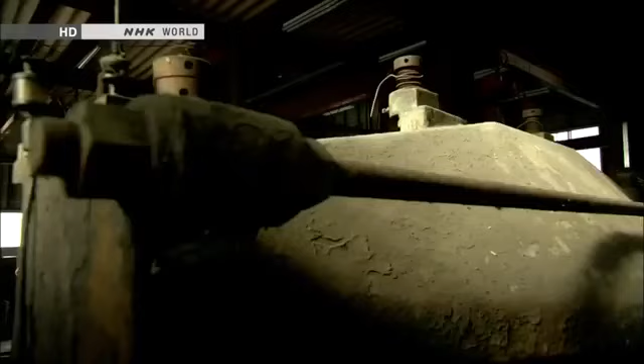The future is just around the corner. In a workshop near Mount Fuji, a curious being has appeared. It's 3.8 meters tall and weighs 4 tons. It is a giant humanoid robot named Kuratas.

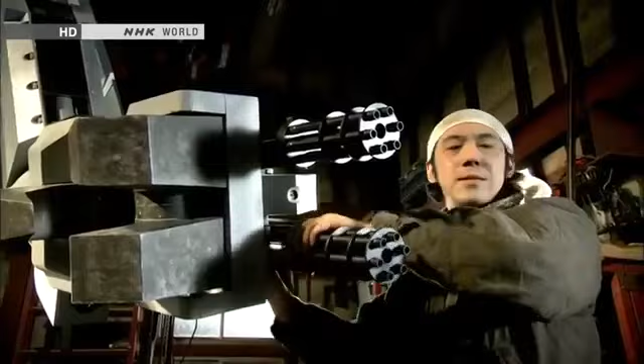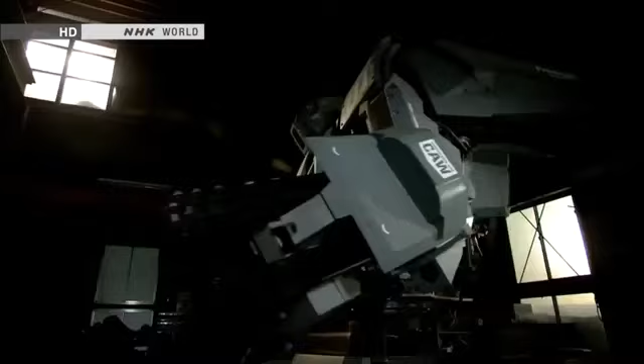Kuratas is a contemporary artist's creation. He holed up here for 2 years, building the robot with input from an expert. He calls Kuratas a work of art, but it's a sophisticated piece of machinery. A person seated inside can control the robot, move its limbs, and grab things. The artist says he was inspired by robots in science fiction tales and animation. That vision sustained him as he worked in solitude.

Things that were once unthinkable are becoming real. How will robots evolve? Well, military applications could be one option. They'll probably become more and more like humans. They could surpass us in strength and ability.

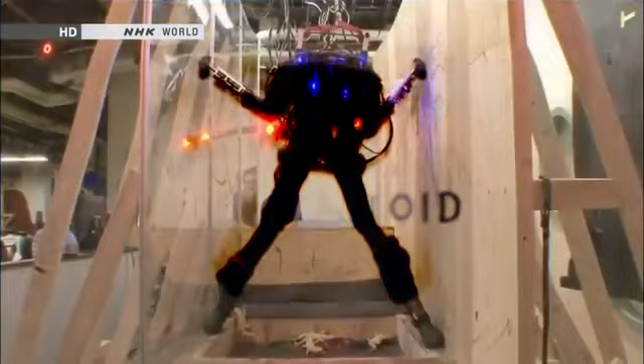People long dreamed of creating these extreme machines. Now, humanoid robots are here. They think like we do, move like we do, and even sacrifice themselves for us.

We want our robot to change society, because robots must be useful. Electronics and computing, progress in vision systems, there's many pieces of it. We will see much more capability continue to grow.

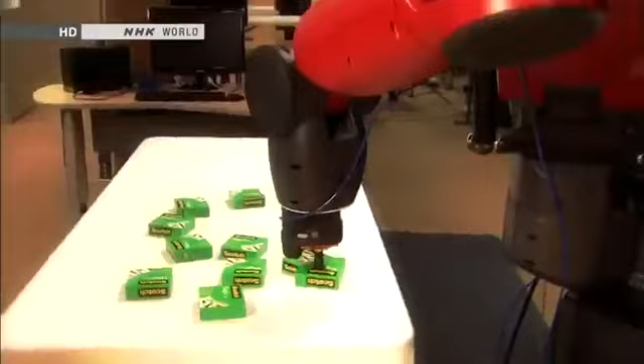Since the Industrial Revolution, people have entrusted some jobs to machines. But there may come a day when humanoid robots do much more complex jobs. Then, what will people do? You'll see more and more robots doing things in society, whether it's manufacturing, service applications, or home healthcare applications. The key will be skillfully dividing labor between humans and humanoid robots.

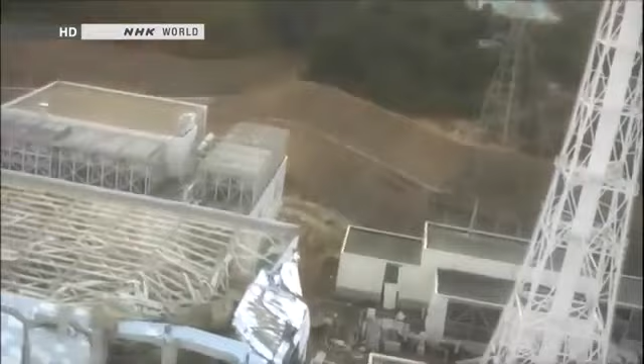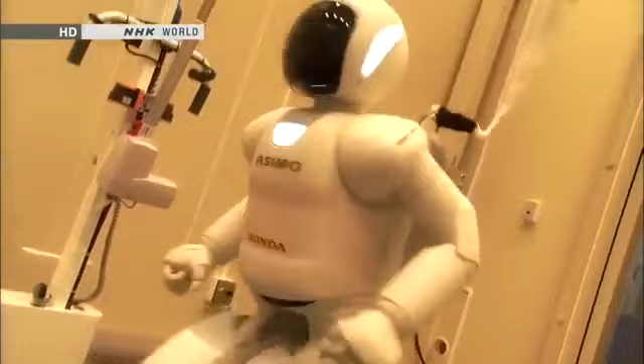We're eager to launch it soon to end the crisis. By joining forces, we can make a truly useful contribution. Only a humanoid could do it. Or the day will come when robots will really assist mankind. The nuclear disaster in Japan sparked explosive advances in humanoids at the front line of robotics development.

This program explores the future that's fast approaching.

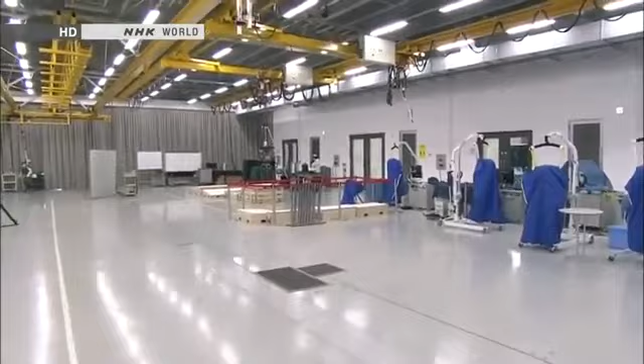Asimo was created by Honda's research and development subsidiary. We were allowed to film their top-secret robotics laboratory. Japan is a worldwide leader in the development of humanoid robots. Asimo is the country's crowning achievement. Engineers continue to make improvements.

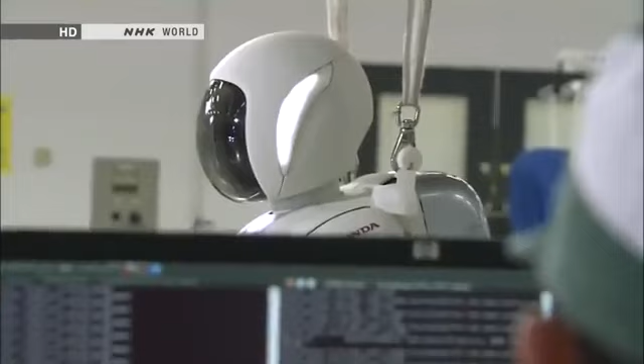Asimo's most innovative feature is its advanced intelligence. The robot can think and act on its own without human intervention. That's made possible by sensors that replicate our 5 senses. Asimo's head contains 8 microphones. It uses them to listen and engage in conversation.

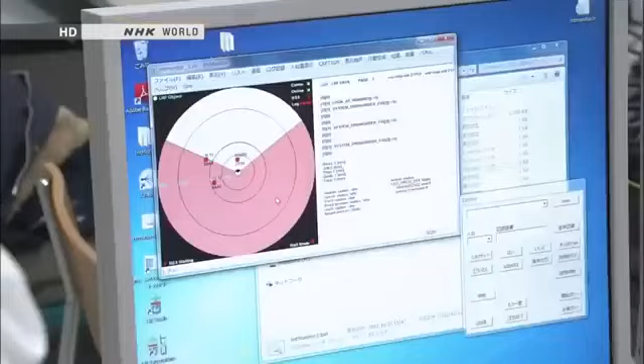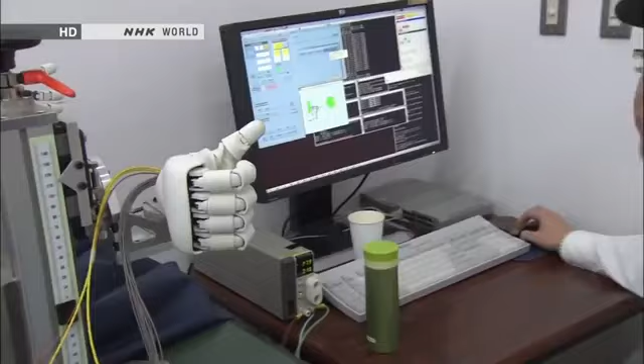Asimo also has a sophisticated sense of touch. Its fingers can make subtle movements, like a person's. Sensors are embedded in the fingertips, too. They can gauge the hardness of an object, like human fingers do.

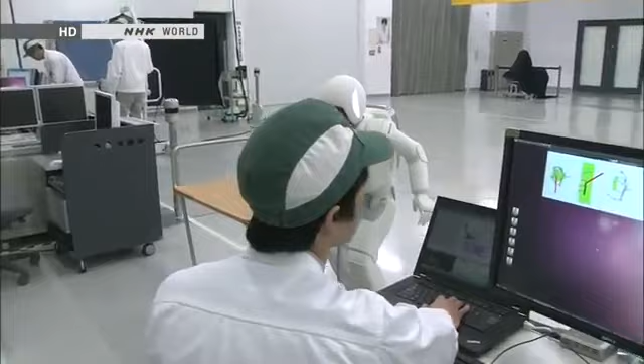Most robots use a fixed amount of strength to grab things. But Asimo exerts more power to open a tightly sealed water bottle and less when holding a paper cup. Its artificial intelligence uses information from the fingertip sensors to adjust the grip.

The developer's ultimate goal is for Asimo to be a valuable partner that coexists with humans. The engineers who created Asimo all grew up watching animated shows about robots, such as Astro Boy, Doraemon, and Gundam. They dreamed of someday making their own.

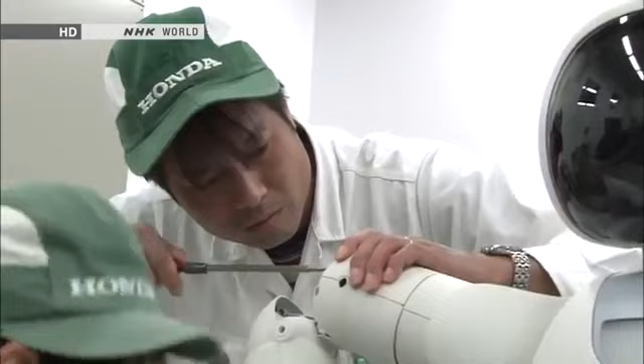Satoshi Shigemi is the development team's leader. He has been designing robots for the past 16 years.

From the beginning, we wanted to design a robot that could help people. To realize that dream, we're constantly asking ourselves, what kind of robot would be able to change society, make people happy, and make life easier for people around the world? Our idea is to create a robot that will change how people live. We're working through the technological issues, one by one, in order to reach that goal.

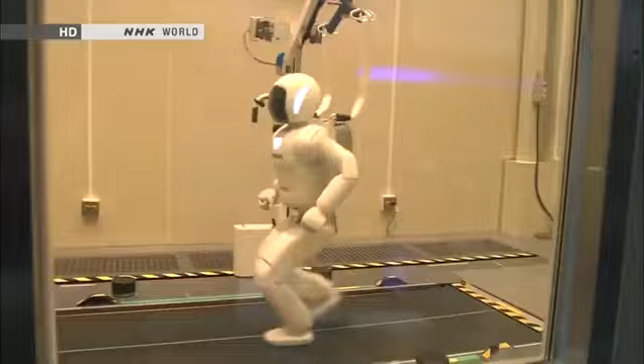Asimo's advanced physical capabilities are revolutionary. The robot can walk and run. It can reach speeds of up to 9 kilometers an hour.

For robots, walking is much easier than running. When running, both feet momentarily leave the ground. Balancing in mid-air is no easy task.

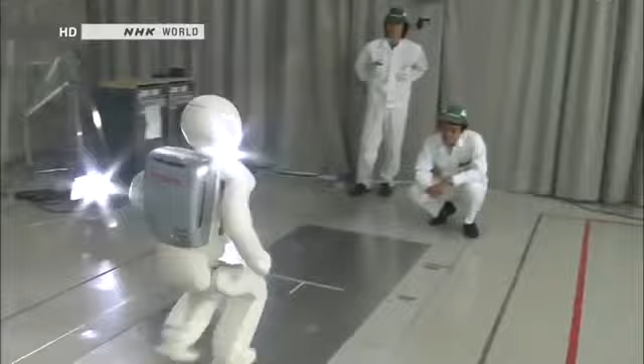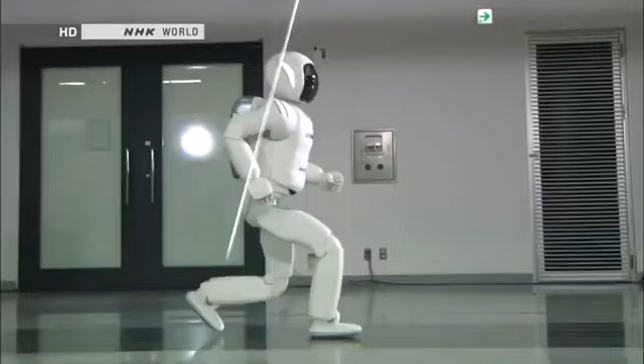Maintaining posture while jumping or floating in the air was a major technological breakthrough. Asimo leans its upper body slightly forward to maintain overall balance. It goes forward straight in the air.

Sensors in Asimo's waist measure the robot's angle. It leans slightly to compensate, forward or back, side to side. That's how it stays perfectly balanced in the air.

Asimo has been evolving ever since development began in 1986, much like a growing child. But something happened that made researchers realize Asimo's real-world limitations.

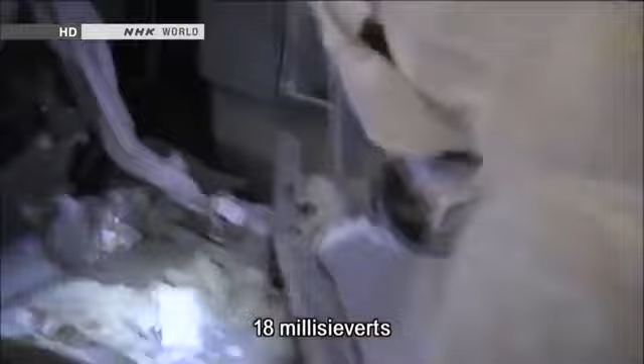It was the accident at Tokyo Electric Power Company's Fukushima Daiichi nuclear plant. The damaged reactors released radioactive substances, making it difficult for humans to deal with the crisis. People needed something that could confront the dangers and bring the plant under control.

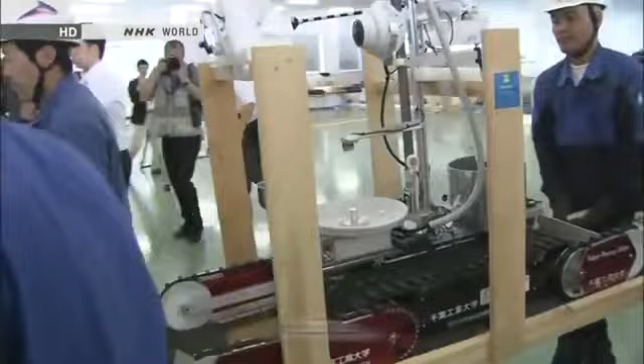Robots. Japanese officials sent a request for robots developed by the US military. Then, a variety of Japanese robots have been enlisted as well.

Robots have proven to be useful, but 2 years after the accident, they're only used for inspections. They're not able to do all the work of humans. What about Asimo?

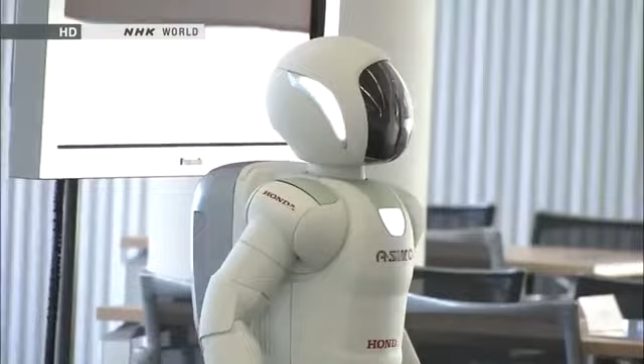Right after the disaster, people flooded Honda with phone calls and emails asking the company to send Asimo to the Fukushima plant. But Asimo wasn't up to the task. It could move nimbly over an office floor and other flat surfaces, but large vertical gaps and obstacles were a different story.

We heard from many customers. We ourselves regretted that Asimo couldn't be of help. It was obvious that Asimo we had built wasn't ready for real-life action. We realized right away that we needed to make something different, something new that could offer immediate assistance.

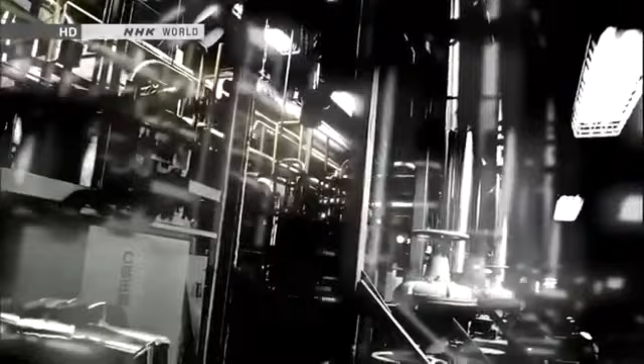Honda wasted no time. Company officials offered to create a robot free of charge to assist TEPCO in the recovery. TEPCO accepted. Officials asked for a robot that could open or close valves inside the nuclear plant. We wanted to flush out radioactive materials that remained inside the pipes and bring down radiation levels in the facility. That was our first goal.

Unless we opened or closed the valves, the area would remain highly radioactive, and that would prevent workers from entering the facility and impact the entire decommissioning schedule.

How many valves are there? Each unit has from several thousand to tens of thousands of them.

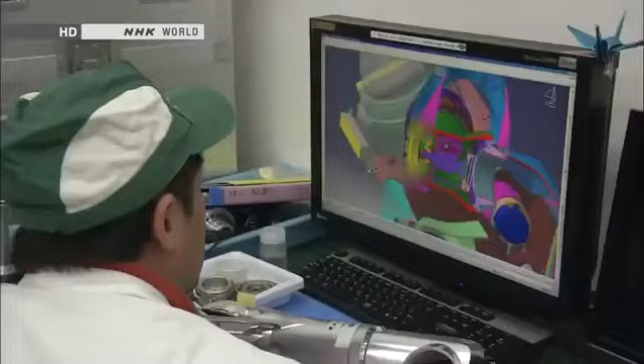In July 2011, 4 months after the accident, Honda began designing a robot for use at the nuclear plant. Members of the Asimo team were put in charge of the project. A humanoid robot would take too long to build, so engineers focused on making a robot specifically for operating valves.

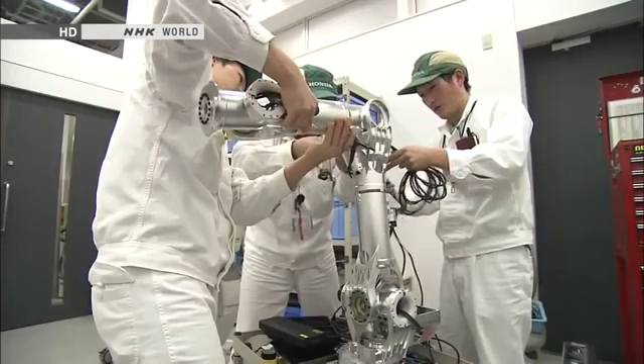Asimo was crucial to their efforts. Its ankles employ advanced balancing technology. Developers reasoned that using it would allow the new robot to work inside rubble-filled reactor buildings.

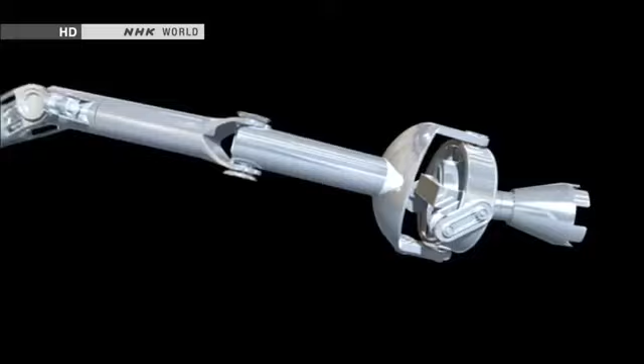The team worked exceptionally fast, completing a prototype in just 4 months. They turned Asimo's leg into an arm for operating the valves. Even when the base moves, the arm remains steady.

So far, so good. Officials from TEPCO evaluated the prototype at the National Institute of Advanced Industrial Science and Technology. The government-backed group for cutting-edge research contributed to the development effort.

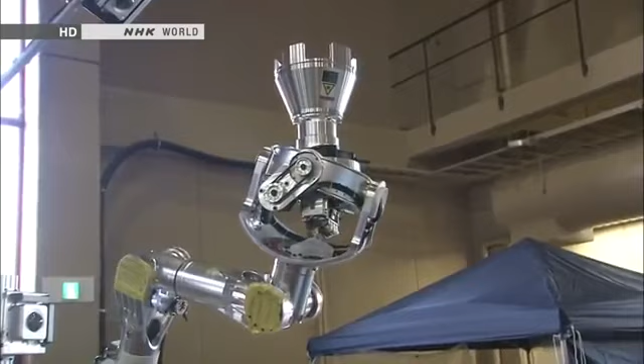A TEPCO official couldn't take his eyes off the robot's movements. We may be quite demanding. That's okay. We might be quite direct.

The test is designed to replicate conditions inside the nuclear plant. The robotic arm is remote controlled. Testers send the arm toward one of the valves.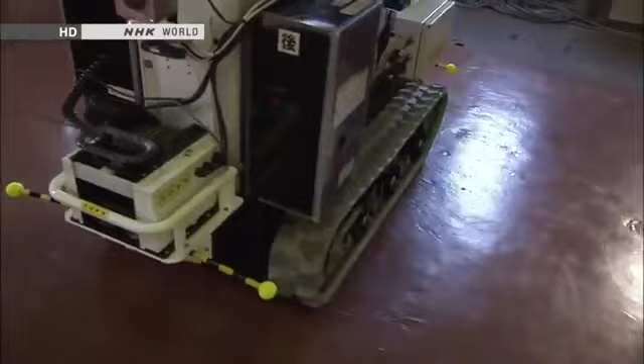There are a number of unknowns, including the condition of the valves. They may have rusted since the accident. A valve might break if the robot applies too much force, or it might not budge at all.

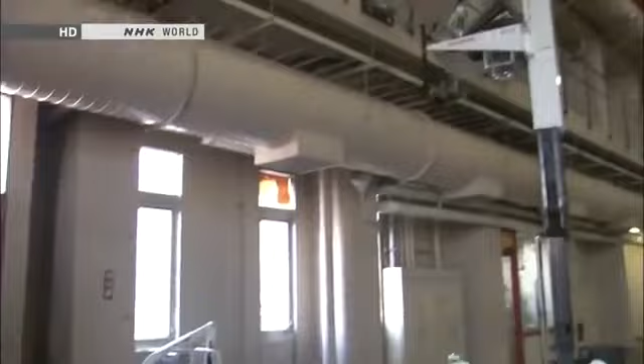The robot uses just the right amount of force and turns the valve on the first try. It's passed the test. This robot can do more than inspections. It could help in the recovery effort.

From what we've seen, the robot seems near perfect. We want to use it as soon as the need arises. It's important that we quickly do what we can to make that possible.

The Fukushima accident also encouraged U.S. developers to design emergency response robots. Department of Defense officials have spearheaded the effort. Before, they had shown little interest in humanoid robots. Now, they view them as vital for disaster response.

The architect of the new strategy is Gill Pratt of DARPA. He oversees funding for leading-edge research at the Department of Defense.

There are many aspects of disaster response in Fukushima that inspire people in robotics to work on new capabilities. If they were able to take action during those first 24 hours, then the first reactor maybe would not have blown up in an environment that is too dangerous for a person to do.

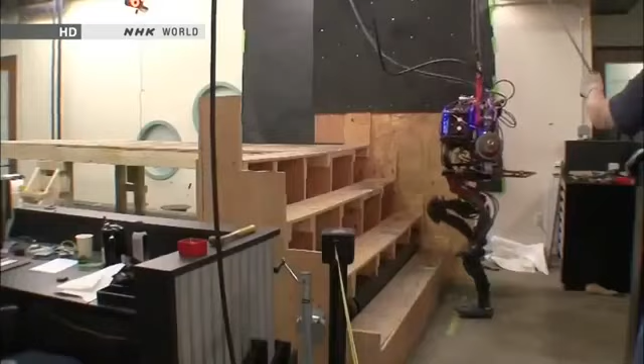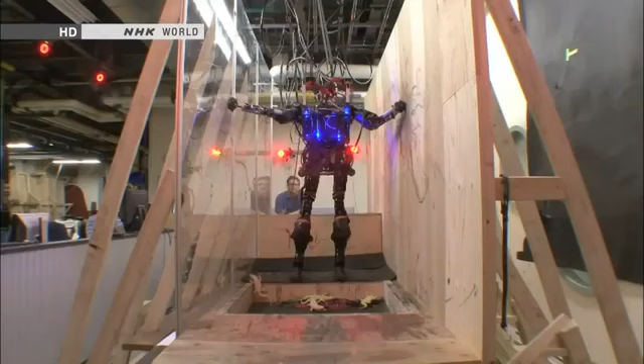Tests of this prototype were going smoothly. It can easily climb stairs and jump from a height of nearly 1 meter. It can negotiate obstacles using its arms and legs. It can already handle more demanding environments than ASIMO can.

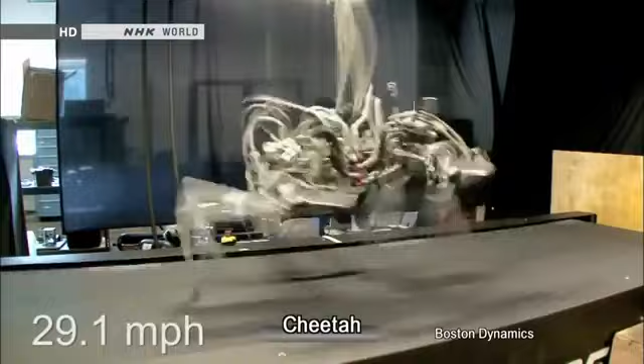Atlas is loaded with technologies originally designed for military robots. A quadruped robot called Cheetah can race through a battlefield at 50 kilometers an hour. LS-3 is for transport—it can carry heavy supplies for soldiers.

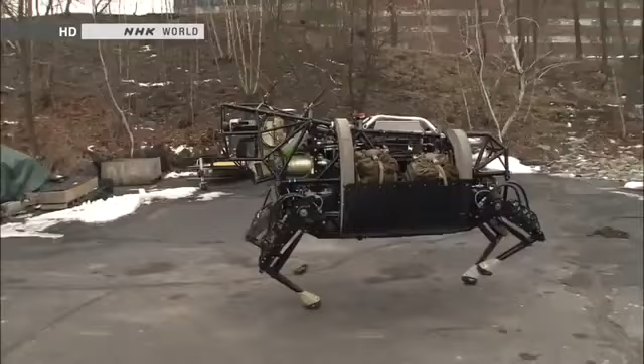The ferocious-looking robot gets its strength from a powerful hydraulic drive system. A hydraulic device can be small, yet quite strong. The black cables convey hydraulic power to the legs, generating the brute force required for harsh conditions on the battlefield. A web of hydraulic cables covers Atlas's body, forming a muscular suit of armor for clearing debris.

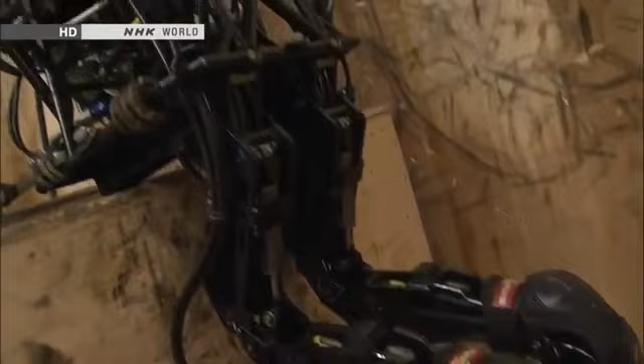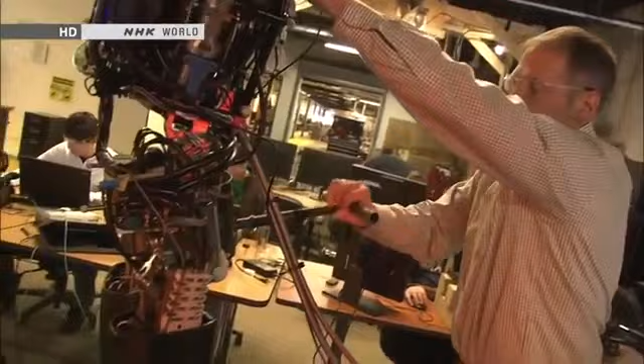Another important technology comes from military robot engineering. This machine's joints have a wide range of motion, allowing for flexibility that humans can't achieve. Atlas's joints are capable of moving in 28 different ways. Atlas can crawl through narrow spaces and withstand sudden shocks.

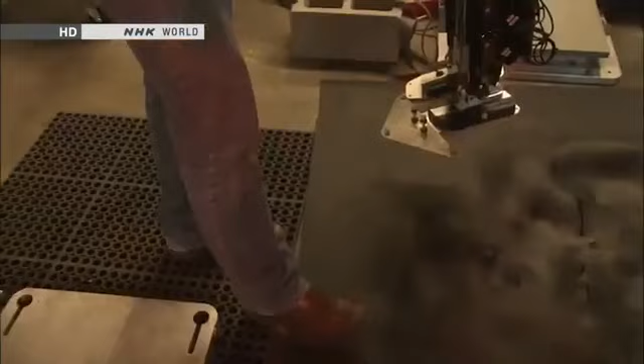But then we have the knee—this has 3 in the hip, just like us. This way, and then this way. I am very impressed with the number of degrees of freedom. It will be able to do these human-compatible tasks without a lot of the limitations that other robots have.

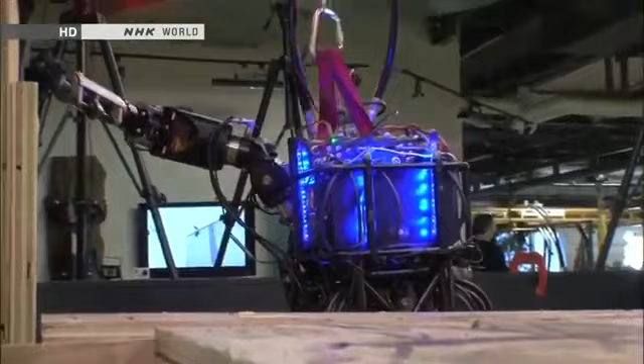Engineers will combine Atlas's rugged body with sophisticated artificial intelligence that's almost near completion. They aim to complete the robot by December of next year.

One reason you see humanoid robots is because some people are really interested in robots as an entertainment thing or a performance thing. I think that's different—we're much more interested in basic capabilities for emergency response and rescue. So I don't think ASIMO has been designed to do those things yet.

U.S. engineers stepped up their efforts to develop humanoid robots after the nuclear accident in Japan. Japanese researchers are embracing the same mission.

In November 2012, robot engineers from around the world gathered in Osaka for an international conference on humanoids. Gill Pratt from DARPA was one of the participants. He came to invite engineers to join a project sponsored by the U.S. Defense Department.

Okay, March 11th. After 24 hours, if only a robot had been there to go and open that valve, the entire disaster could have been averted. But we didn't have one, and furthermore, we didn't have anyone that could do the job. So shortly afterwards, we actually started planning the DARPA Robotics Challenge.

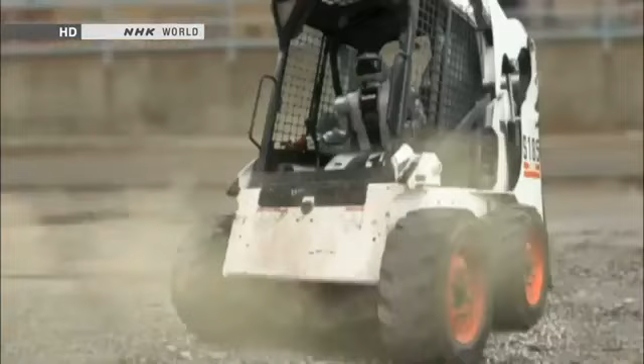The challenge consists of 8 tasks: driving a vehicle to approach a disaster site, walking over rubble, removing obstacles, opening doors, using tools to break down walls, climbing ladders, turning valves, and making repairs.

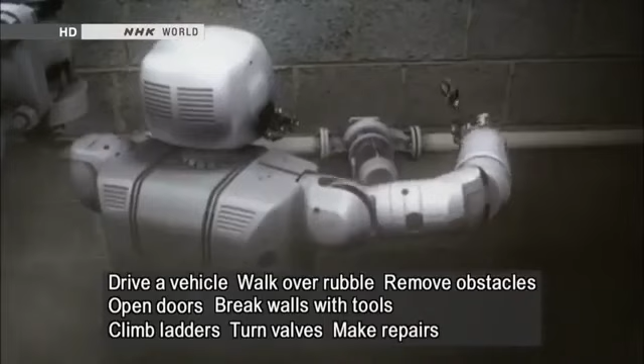A single robot must complete all 8 tasks. The development period is 2 years. DARPA will provide contestants with funding of up to $4 million.

DARPA has received over 100 proposals from research groups worldwide, including renowned organizations like NASA and MIT. Japan is at the forefront of humanoid robotics engineering, yet its researchers hesitated to throw their hats into the ring.

So actually, to me, it's difficult not to see that some of the results of DRC could be used to advance military technology. The DRC is about developing robots that I believe wholeheartedly are completely impractical for offensive military purposes. Will the technology we come up with find its way into military systems? Probably yes. But I guarantee you that if you work on a robot for healthcare, there's a chance that technology will also find its way into military systems.

The members of one Japanese research institution wanted to take part in the competition.

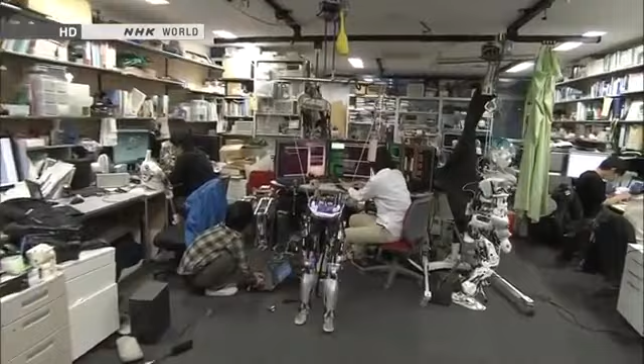They worked at the University of Tokyo's robotics lab. Researchers there, along with those at Honda, are global leaders in robotics engineering. But they faced a major obstacle to competing: the university bans military-funded research.

Three researchers made a decision. They told the university they were leaving. Then they decided to set up a venture company and enter the DARPA Robotics Challenge. They couldn't shake the feeling that they should leave their quiet university lab and help resolve the nuclear crisis.

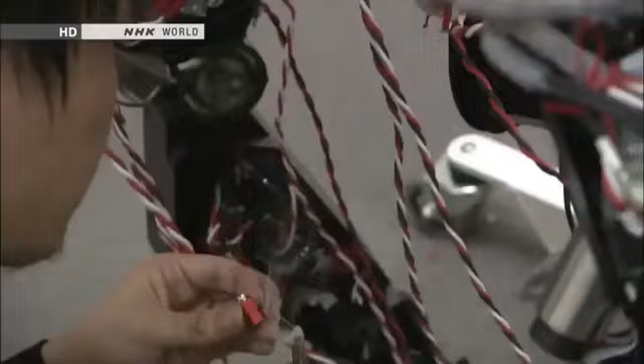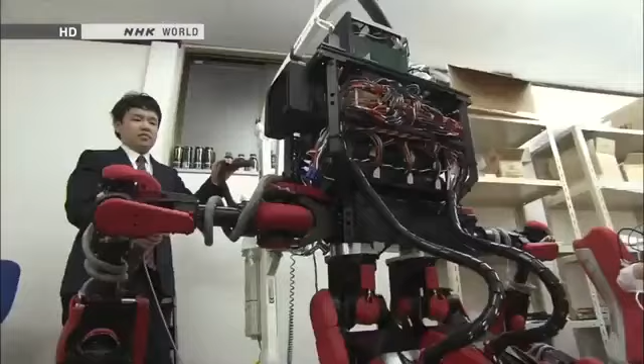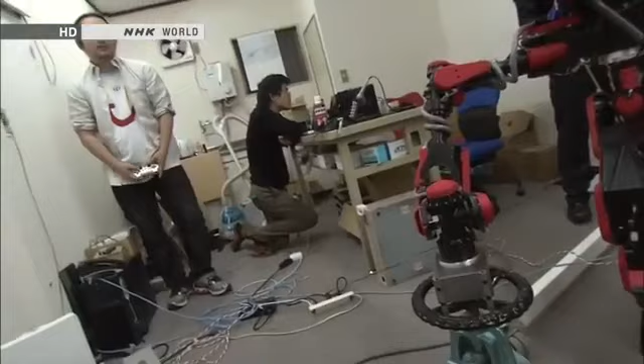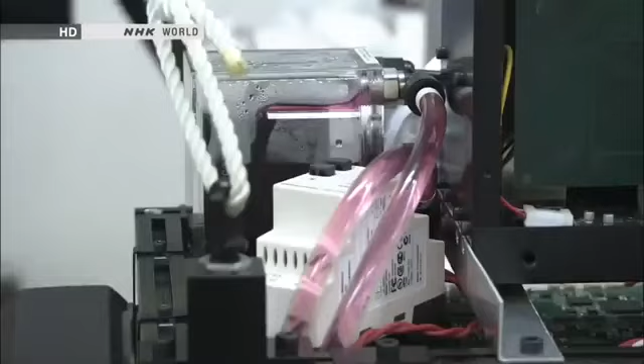The strong force comes from a large electric current that pushes the motors to their maximum limits. A reddish fluid circulates through the robot's body, serving as a coolant that keeps the motors from overheating. This cooling system should enable the robot to perform hours of grueling work at disaster sites.

The time has now come for the developers to apply their years of research to the real world. A nuclear crisis has happened here in Japan. Radiation is escaping. Researchers in every field must wonder at least once if the technology they've been working on could help resolve the crisis. By joining forces, we can make a truly useful contribution. It's with this in mind that we decided to enter the competition.

One country is quickly catching up with Japan in humanoid robotics: South Korea. KAIST is a government-funded lab for the advancement of science and technology. Researchers there were among the first to express interest in DARPA's Robotics Challenge.

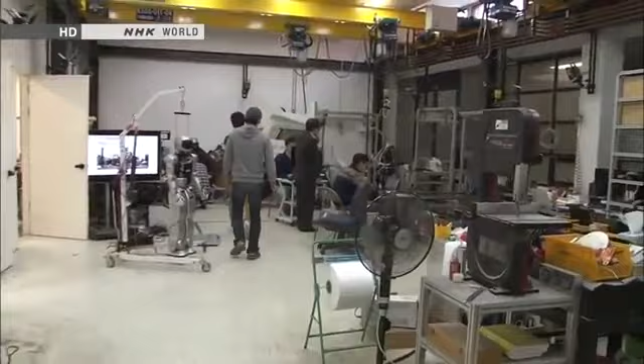This humanoid robot is called Hubo. It's modeled on Asimo, which Honda spent 14 years developing, but Hubo was built in just 5 years. Hubo deftly manipulates its hands, and it's also good at dancing. Its moves look just like Asimo's.

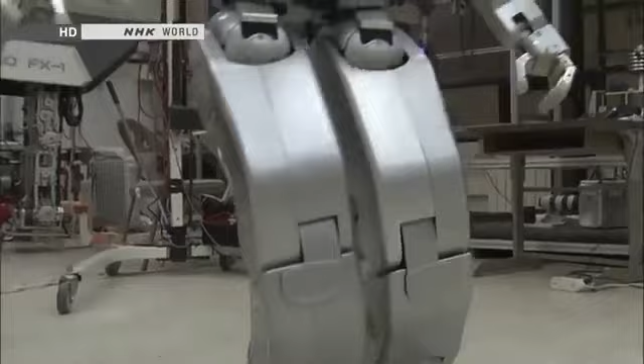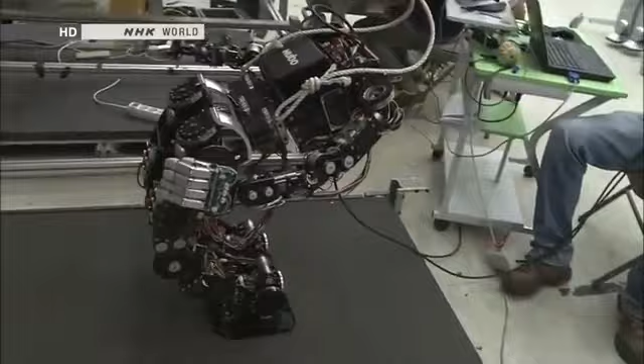Hubo has been undergoing a major upgrade ahead of the competition. It can now bend forward at the waist while walking to handle all kinds of environments. It can quickly pick up tools. The tests were going well.

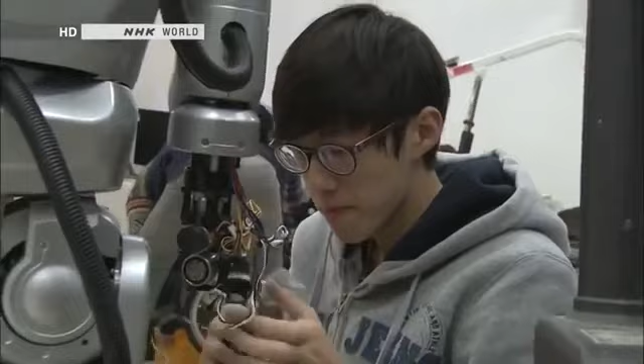People have always compared Hubo to Asimo. Engineers now had a strategy to get ahead of the Japanese developers. They decided to publish certain details about Hubo's design and pursue joint development with researchers at other institutions. One could say that this space inside Hubo's chest captures the heart of their thinking.

It's empty now, but this is where artificial intelligence will be installed. It's removable. Hubo does not yet possess artificial intelligence. Its motions are as sophisticated as Asimo's, but Hubo's movements are all pre-programmed. U.S. universities that lead research into artificial intelligence will develop a brain for Hubo.

The stage has been set for a joint U.S.-South Korean team to compete in the DARPA Robotics Challenge. Sharing is the key to making technological advancements. That's true in South Korea and in other places too. Research shouldn't be confined to one place. People developing humanoid robots elsewhere are too close-minded.

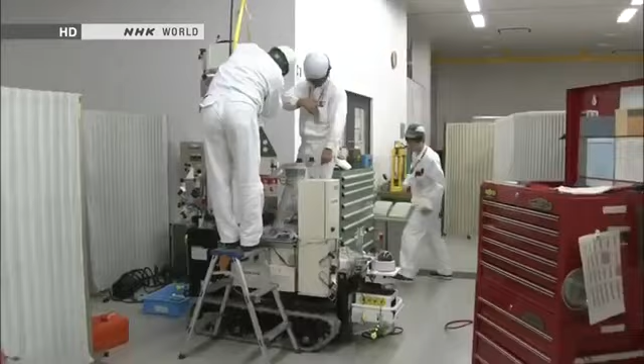Researchers at Honda were also invited to enter DARPA's competition, but they declined. Their energies were focused on designing a robot to tackle Japan's nuclear crisis.

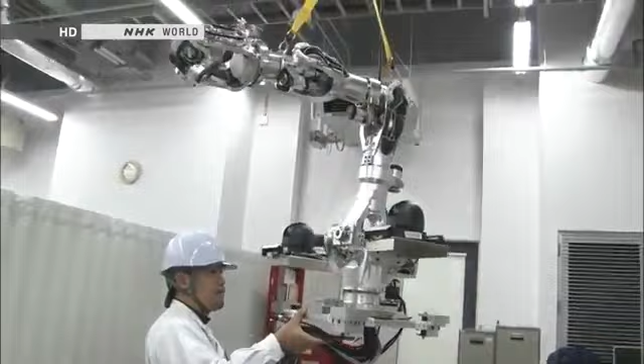Nearly a year has passed since Honda's robotic arm passed evaluation tests, but the device has yet to be deployed to the nuclear disaster site. That's because officials at TEPCO requested a change in specifications. Engineers have replaced the valve-turning hand at the end of the arm with a camera.

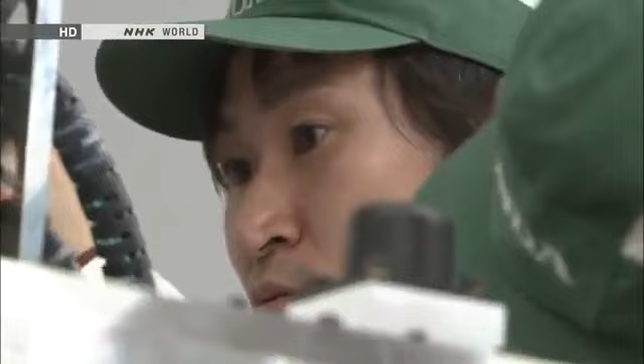TEPCO had changed its plan. Officials decided to put priority on assessing conditions inside the plant's facilities. They said it was too early to have robots work on valves. There wasn't even a recovery plan in place when we were working out the valve manipulation tasks.

Confusion also prevailed at the site. We were expecting valve work to begin 2 to 3 years after the disaster. But the timing has ended up being later than what we'd assumed 1 month into the crisis.

The robotic arm will soon be sent to the accident site. It will provide the first images filmed from high up. The robotic arm was not the end of Honda's efforts. Its engineers had another secret mission.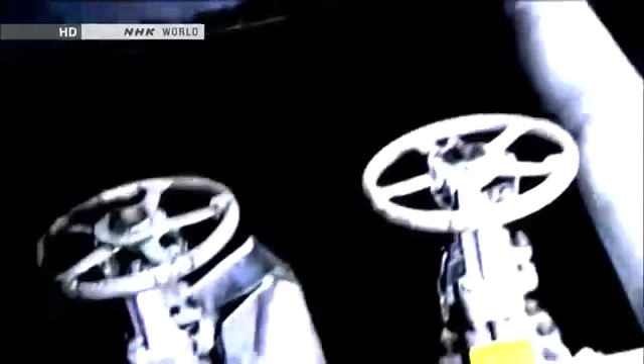They would develop a new humanoid robot, an updated version of Asimo for use in disasters. The site where the Fukushima disaster took place is dark and off-limits to humans. Only a humanoid robot with both intelligence and motor skills could climb over the debris, get to the accident site, and perform the work of people. In other words, a robot like Asimo.

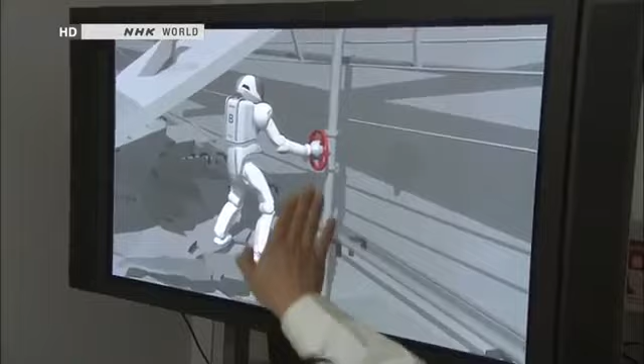Let's use our skills to make a humanoid robot that can tackle disasters. Asimo's engineers were united by this idea. The robot they envisioned would not only walk, but also use its arms to crawl. It would use every means possible to reach its destination. A dramatic update would be necessary.

A disaster reduction robot would be useless if it couldn't get to the site. It's important to get to the scene no matter what. Disasters create all kinds of debris that crumbles easily or breaks when stepped on. It's because it's dangerous that robots replace humans. That's what makes them valuable. A robot that couldn't get to the scene would be totally useless.

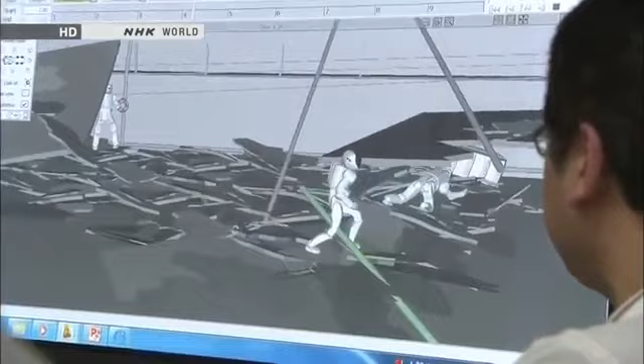Honda's engineers began developing robots in 1986 with the goal of making people happy. 27 years of research is now being put to the test.

As we saw in the Fukushima Daiichi crisis, the bottom line is that robots can stand in for humans in places that we can't go to or that are too dangerous. I am committed to delivering what's needed, when needed, in the shortest amount of time.

The accident in Fukushima spurred the development of humanoid robots around the world. The disaster also prompted people to question the roles of humans.

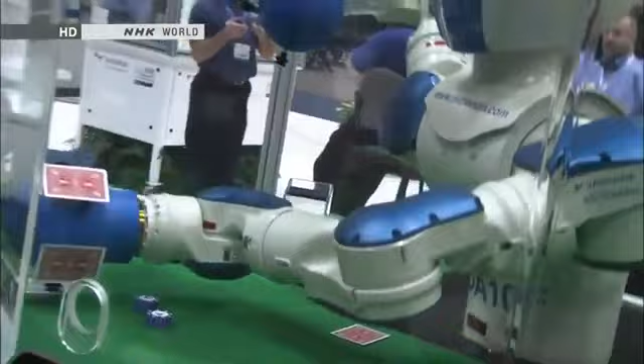One of the largest industrial robot expos took place in January. Global manufacturers displayed their latest models. Companies are developing more and more two-armed humanoids for industrial use.

One new product at the event caught a lot of people's attention. Baxter was created by the inventor of a best-selling cleaning robot. It's equipped with sophisticated artificial intelligence.

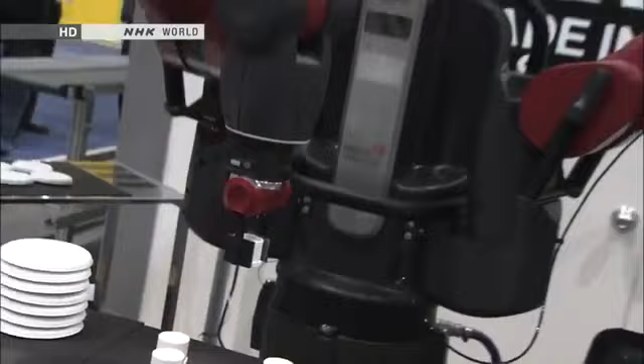Baxter is designed to work side by side with people in factories and other settings. The robot's most unusual feature is its ability to master a task in a matter of 5 minutes. All that's required is step-by-step manual instruction. No complicated programming is needed.

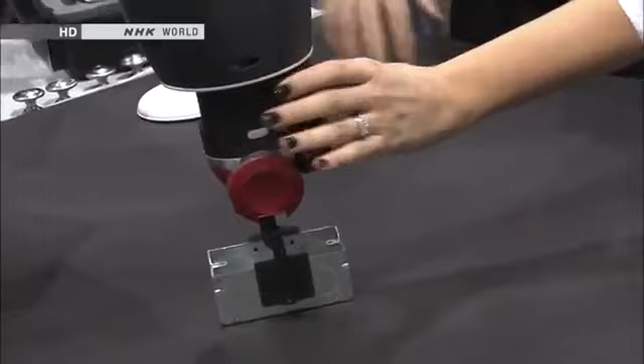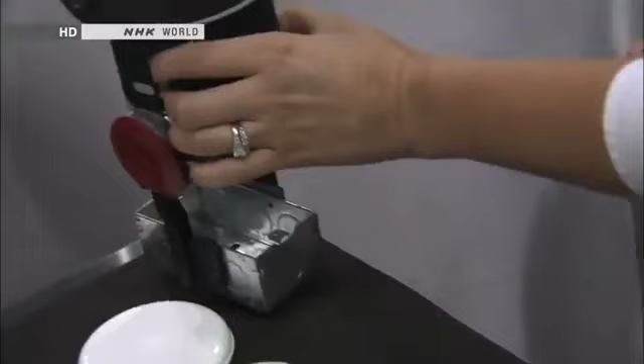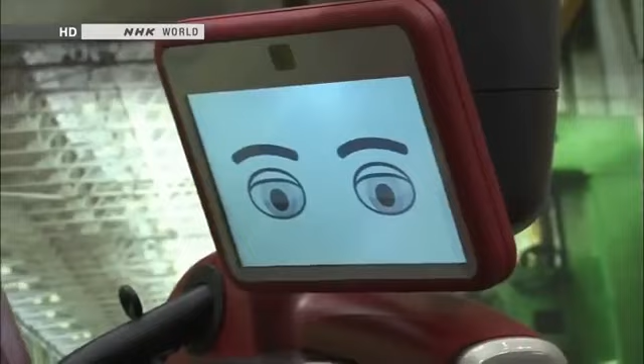The expression on the face on the LCD screen shows whether or not the robot has understood the task.

Baxter costs $22,000, a bargain for a humanoid robot. The maker says buyers can recoup their investment in several months and slash labor costs.

I'm very impressed with it. I work for a small manufacturing company, and we have some older employees who are looking to retire. There's some tasks that Baxter could do for us very effectively, plus it would be cheaper than employing a person. It's not going to get tired, it's not going to need to stop, it'll keep running while everybody else is taking their lunch.

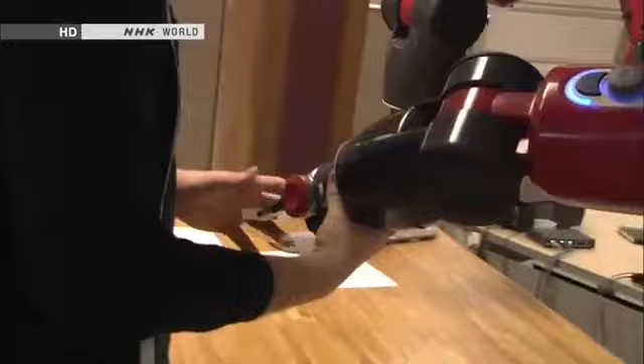The Boston-based manufacturer has a flood of back orders. Officials say someday Baxter will work at places like coffee shops, taking orders and grilling burgers. Eventually, they expect to have 500,000 U.S. customers.

Today we're focused on manufacturing, and there's a very big opportunity in manufacturing, but there's lots of other places a robot like Baxter could go. We had the Industrial Revolution at the turn of the last century. We've just gone through the computer revolution, effectively at the turn of the most recent end of the century. We are now into the robot revolution.

Will people and robots someday compete for jobs?

At 8:30 one morning, a group of new employees takes part in daily morning exercises. They are 13 humanoid workers called NEXTAGE. This company began using the robots in earnest last year.

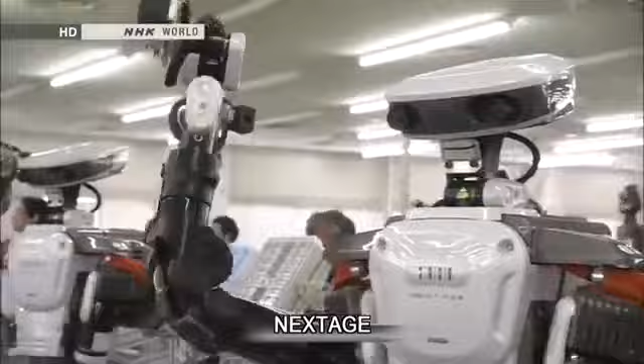They have 2 eyes and are just like humans. They're cute.

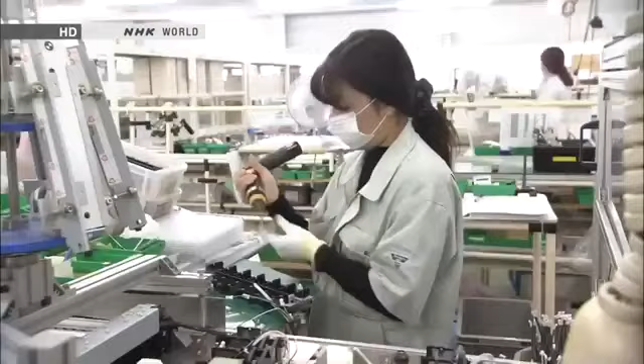This factory manufactures money sorting machines for cash registers. The humanoids work on a production line that was previously manned entirely by humans. The robot visually confirms the parts set in place by a human worker, then it begins its task.